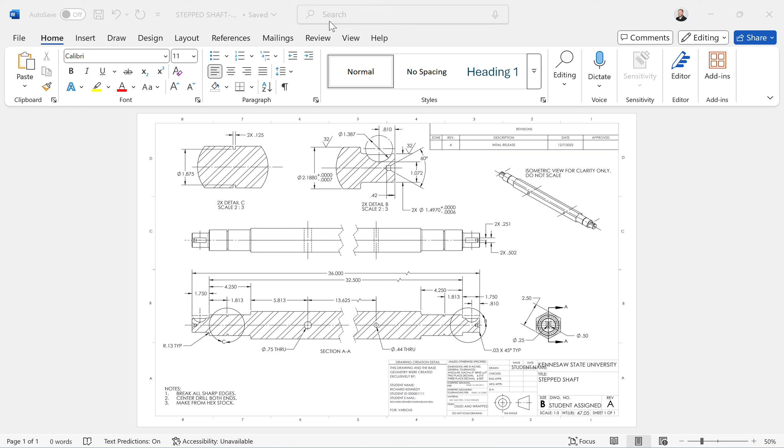So let's open our drawing and look around. I see things like 0.75, 32.5, but if you actually look down in the bottom here in the info, we can see the weight is in pounds, showing us 47.05 pounds, which we can actually inspect after we make this part, to see if it's somewhere close to here.

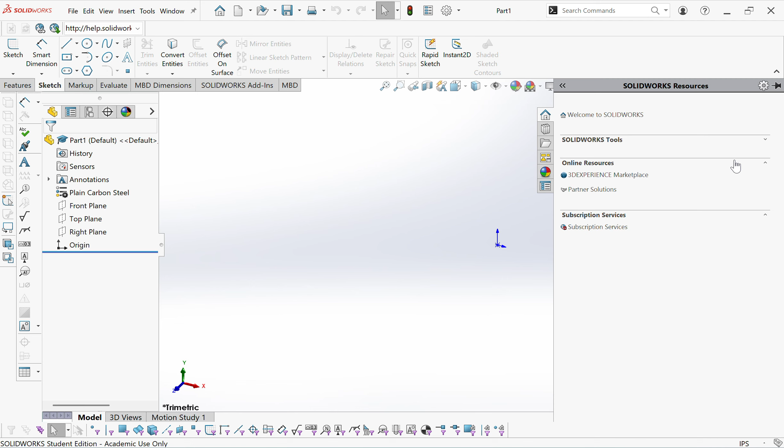So let's go back to SolidWorks, and we're going to go into our SAE units. So open that up. All right, now I have this up here. You can just click anywhere on the main page and that'll go away.

So we're in our work environment, and we're going to start our sketch. I'm going to take a look at my part. I'm going to most likely make it symmetrically and extrude it both ways, that way I can mirror this feature over, all the major design points, and then the minor differences, like this is a bigger hole, that's a smaller hole, I'll make those separate.

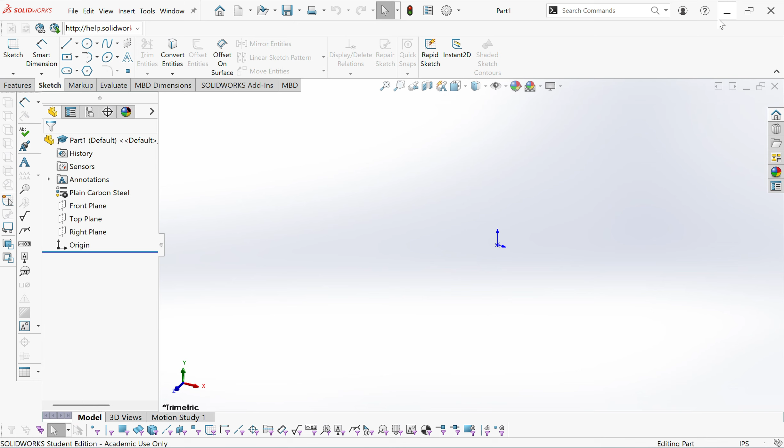But let's see, I made this and I only got up to the point where I was making this before, I didn't get through the whole part. So again, this is just kind of showing you what I do and how I'm going through this. I'm going to start my sketch, just pick the front plane. The first thing I noticed off the bat is there's a few circles in there, and I'll have to go back and look. I think I was doing 3. So sometimes that doesn't sit down perfectly.

I'm going to drag this and put it on that point. So you can do a few constraints and make sure those are all concentric, so they're all sharing the same point. I can't drag it off there, so it's paired to that. Now I can just adjust the size of these.

I'm kind of getting into the weeds here, but let's get back on it. So this is the view I'm drawing. I'm going to need the length of this line, which is from here to here, 1.4970, and from here to here, 2.1880. I'm also going to need this little collar, I'm going to make that 1.875. So those are going to be the diameters I'm going to use.

So let's start with 1.4970. This plus or minus, that's just machine tolerance, how much up or down you can be. So 3 zeros and a 6. You could have 1.4970 or 1.4964 -- that's going to be 6.4, 4964 is going to be the lower tolerance of it. And that's just going to be for part fitment.

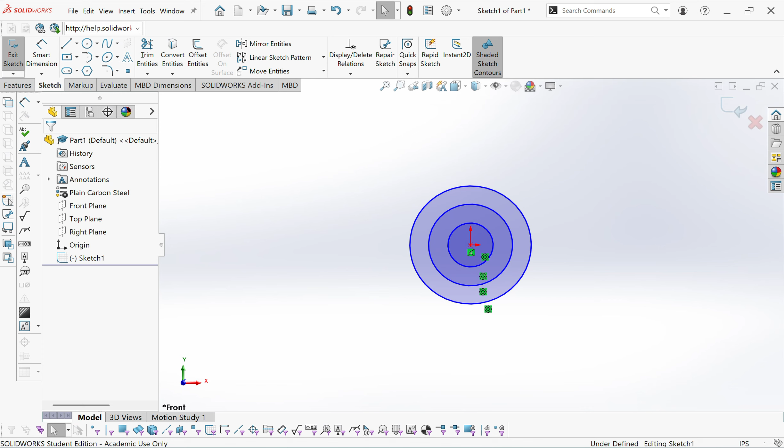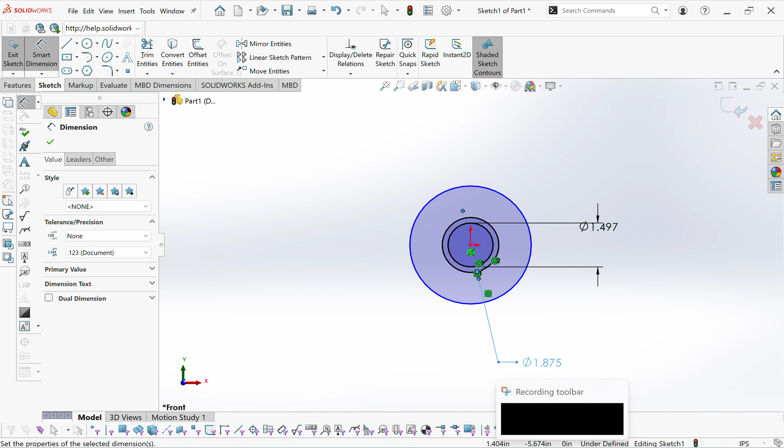So I'm going to take just this major number right here, 1.4970. Smart dimension, grab the first circle, 1.4970, enter. Let's find our second circle, it's going to be 1.875. All right, that's going to be that little collar. And next circle, 2.188, still in dimension, 2.188, enter. So now we have all of our parts.

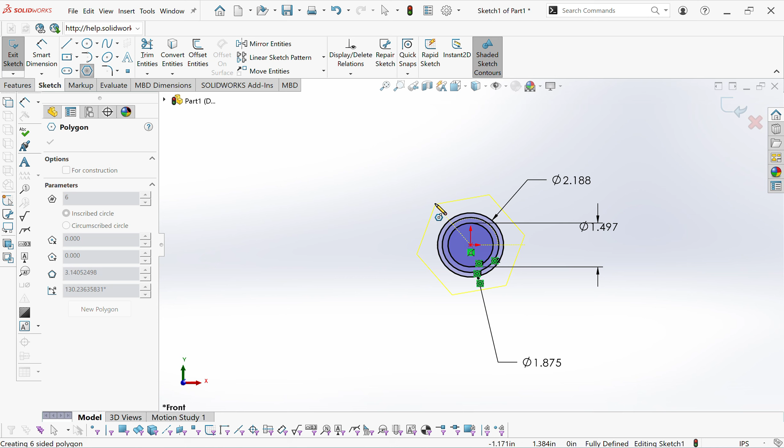We're still missing, though, this hex around the outer edge. So that's 2.5 across. The way I'm going to make that is grabbing the polygon tool, and it's going to default on the shape I need. I'm not going to attach it to anything yet.

What I'm going to do is make a construction line straight up from the center point, and you can see this constraint's added to it, so it's vertical right now. I also want to click on that and change it to a construction line, by clicking this and switching it to construction geometry, which you can also do over here and hit for construction.

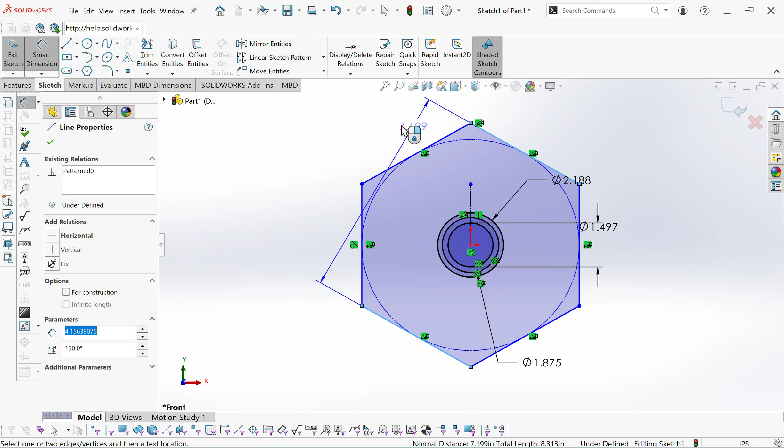What I'm going to do is click this point, hold down shift, and select this line to make those coincident. Now it's facing the direction I need. Now I just need to dimension from here to here and make that 2.5.

So now we have our drawing, and we can work off this. Now we're getting somewhere. I'm going to go to features, I have this drawing already selected, and I'm going to do boss extrude, from sketch plane, mid plane, and let's see how long this bar is.

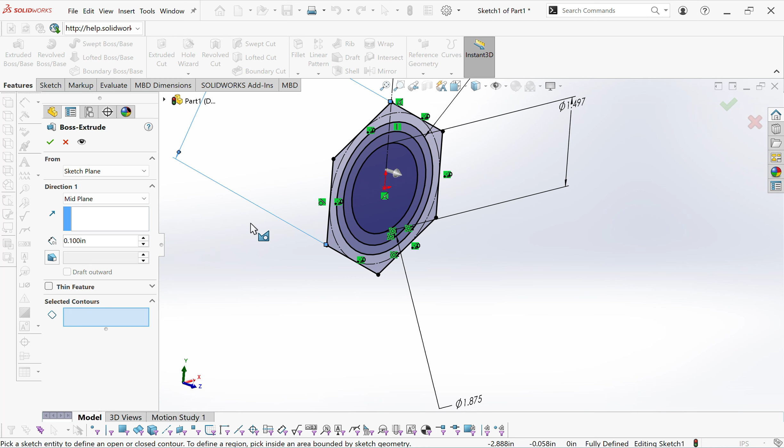First we're going to do 36 inches. Let's click this first one, and I'm going to do 36, make sure it's inches. It should be, yeah, 36 inches. Mid-plane. Check. Cool.

So now what I'm going to do is select this sketch again, hit features, and extrude. So now I'm going to select - oh, you know what, let's pause right here.

Yeah, so that's the inner circle. We need to pay attention to where that is. So we need to do the next two circles. We need to extrude on this one because I'm going to cut the collar out later. So it's going to be here and here - how far? 32.5 inches. So let's do this.

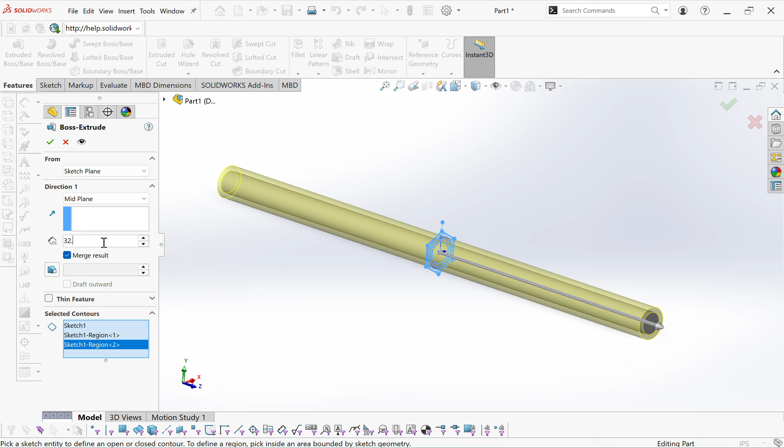32.5. All right, hit check on that. And then we've got this part right here, which is this hex shaft. That's 2.5. That's right here.

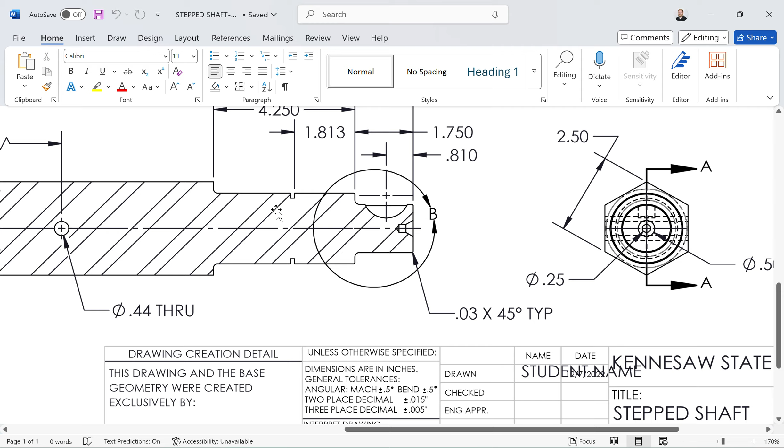And I've got 36, got 32.5 minus 4.25 plus 4.25, which is going to be 8.5. So 32.5 minus 8.5. And if you don't want to put all this in here or do the math, you can type the formulas into SolidWorks. I've gone over this in some other videos, but you have 32.5.

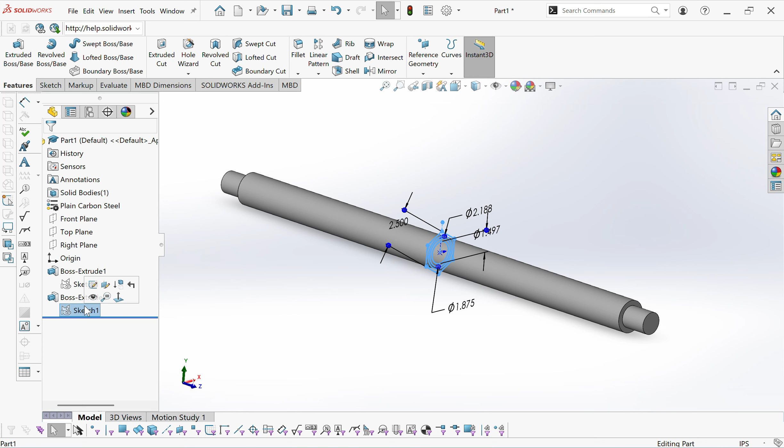So now let's see, let's go within this sketch, edit - oh sorry, I didn't necessarily need to hit edit. I just needed to select the sketch and go to features, extrude, and I'm going to select this hex. Now I have 32.5, and if you remember, I need to subtract 8.5 from that.

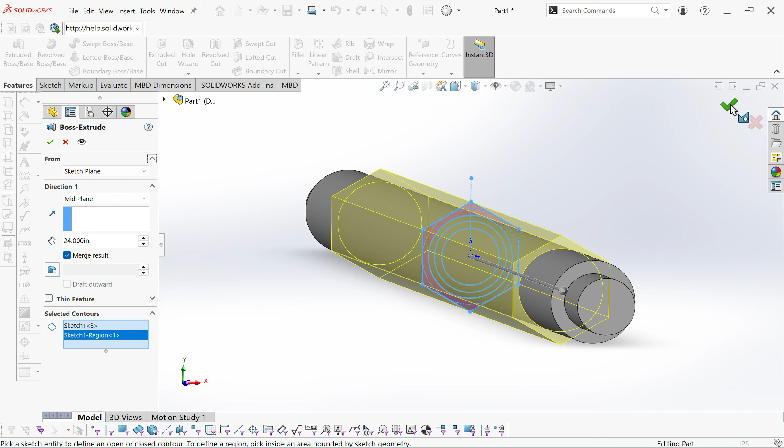So now this is what my part looks like - it looked kind of weird like that, super chunky, but this is what my part is starting to look like. Now we can go back to that other circle as well. I might have actually wanted to do that before this, but let's try it from here.

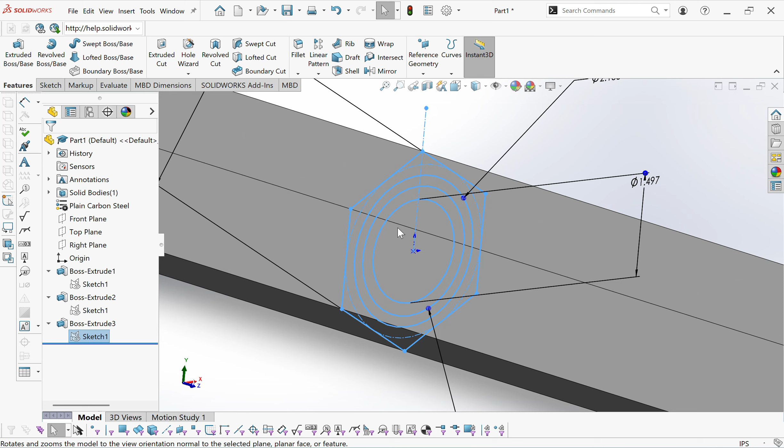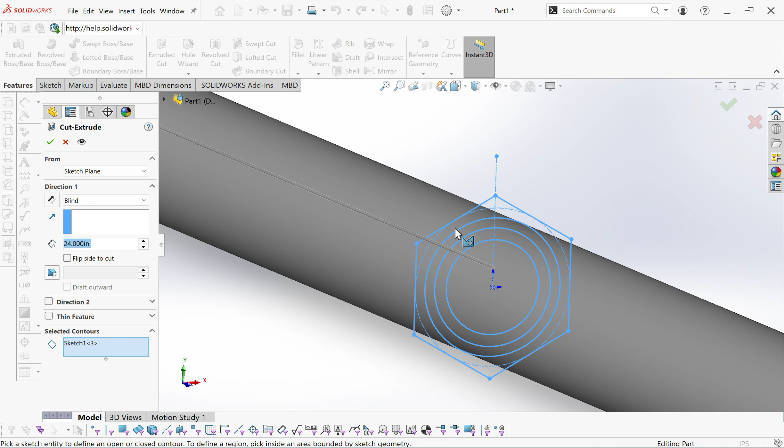If I hit sketch and select - yeah, I'm going to control Z back from... I'm going to go forward. So what I think I actually want to do here first is select this sketch and extrude cut the outer circle if I can. Yeah.

So this one is a little tricky. I need a cut that is 0.125 thick to be offset 1.813 from that face. So let's mess with some stuff and see what we get.

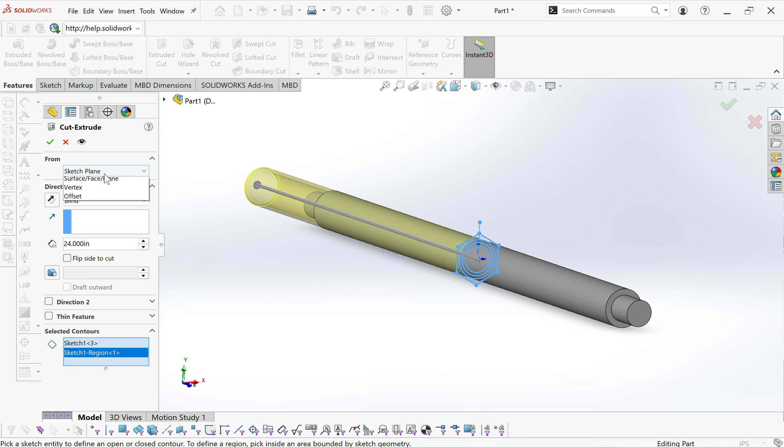We're going to do offset from - oh, I guess it doesn't matter the face, we'll go offset from the drawing. Let's do 3 inches and see where that puts us.

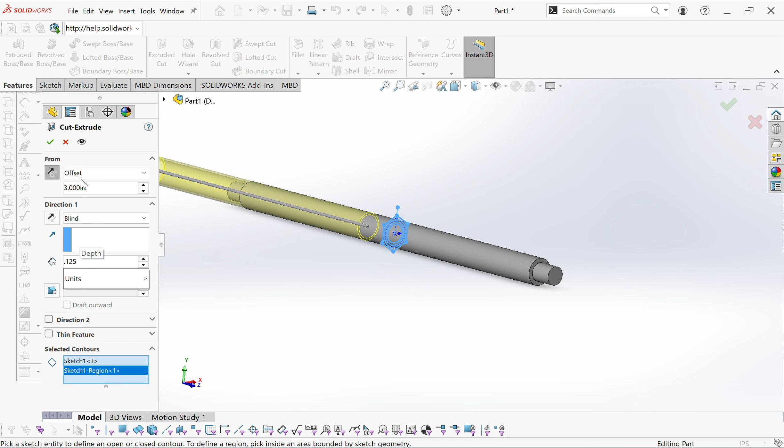So that's where the offset is, and you can change the direction here. See, this is going to be the thickness of it, I think, so 0.125. All right, so that's the thickness. Now, where is it measuring to? Which side of this cut? I'm assuming this inner part, but we can mess with these dimensions and see.

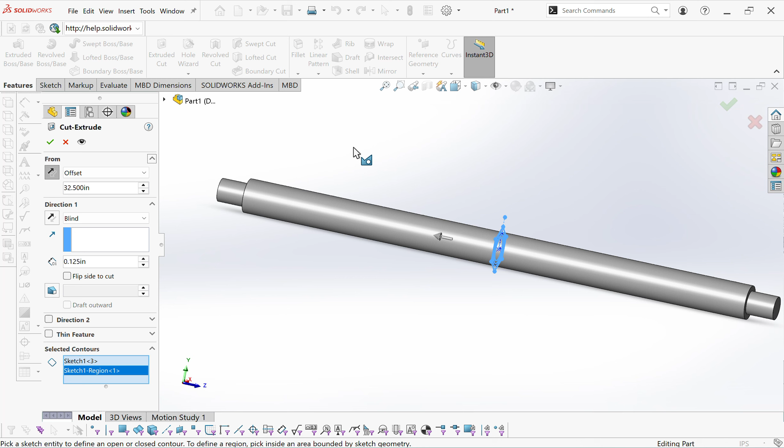Oop, didn't mean to open that. Let's go back to here. 32.5, it should land on the outer face. So if we do 32.5 - oh, now it's way out here because I was on mid-plane.

So again, typing formulas in here, let's type in divided by 2. And now you see the cut is landing on the front of that face. So if I subtract 0.125, right, now it's measuring from that face.

It's kind of hard to explain, but what I had was that cut was just in front of here, and I subtracted 0.125, the length of that cut, and now it's right here. I need to make whatever line is right here set back 1.813. So all I'm going to do is, now that I have it flush here, subtract 1.813.

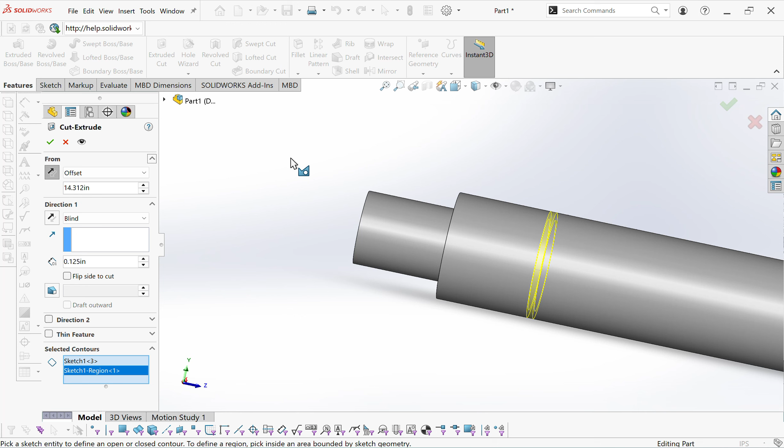Now I have my cut. With that cut, I'm going to mirror, and that cut extrude is already selected in features to mirror. When I click my mirror face or plane, I'm just going to go back to the plane that I was designing on initially. So it's flipped symmetrically along there. What I'm going to do from that is go back to my sketch and select that.

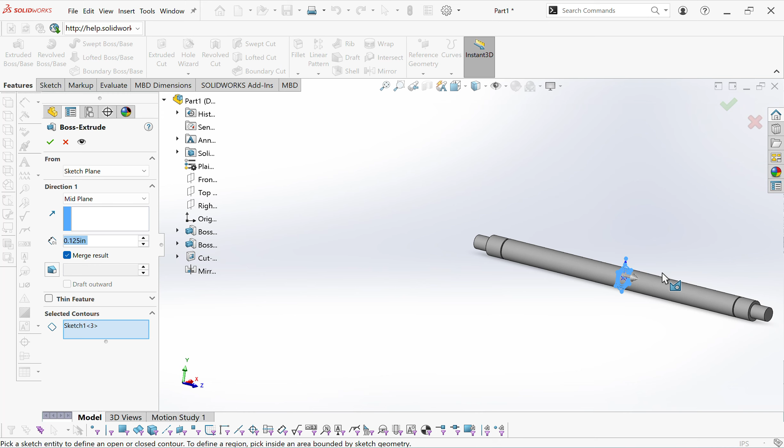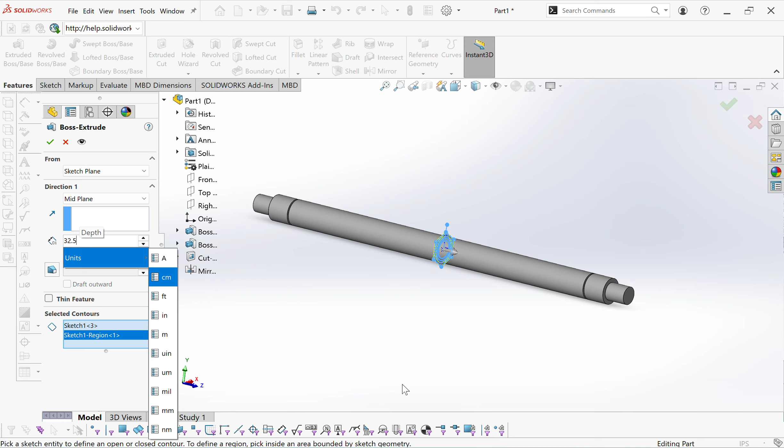Now I can extrude this hex. So that hex was extruded. Again, I'm going to keep opening that just on accident. 32.5 minus 8.5. So let's do 32.5. Let's just make sure, 32.5 minus 8.5. Minus 8.5. So now it's starting to look closer and closer to what it is. Let's see what other steps we can do in here.

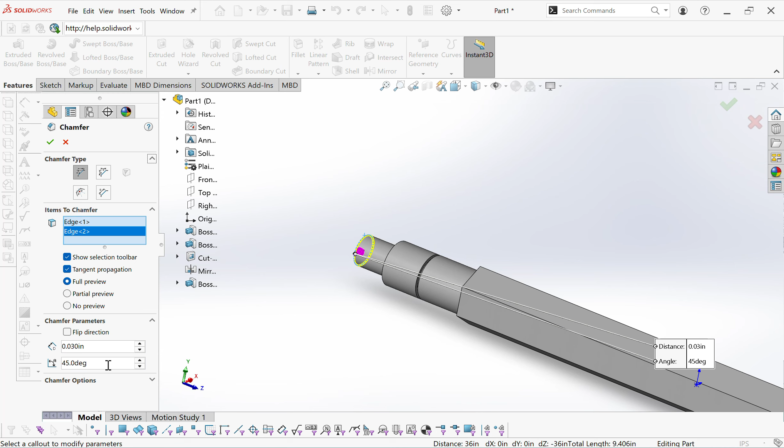We have 0.03 chamfer, 45 degrees typical. So let's take that off. We're going to go to our fillet drop down and hit chamfer. We're going to click that edge and that edge. We're going to go, I think it was 0.03, 45 degrees typical. Let's just double check. 0.03, 45 degrees typical. And typical just means anything that you see with a chamfer is going to have the same. Typical just means it's the same all the way around.

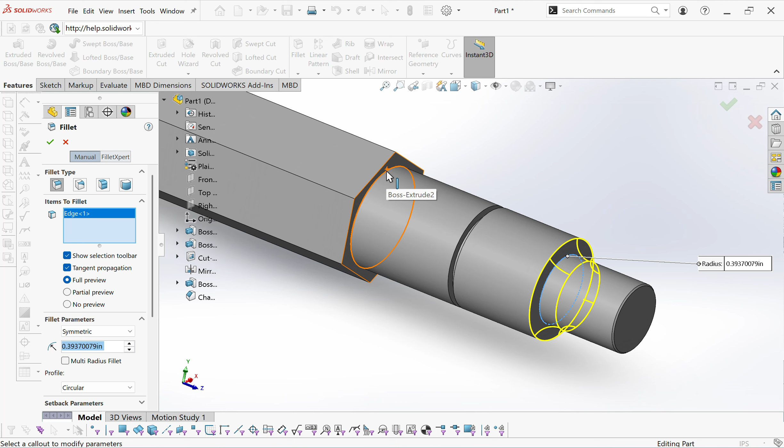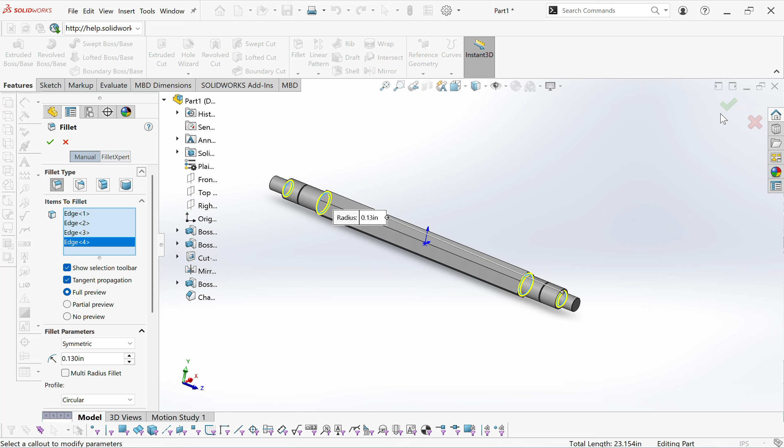Just like I'm sure this radius is going to be typical, so let's find that. Radius 0.13 typical. So let's put those in and hit our fillet tool. We're going to fillet this, that, and then the same ones on the other side. Right there and right there. And you can see it's radius. Make sure you have the right one if it's radius or diameter. Radius is 0.13 typical. 0.13. Accept. Cool.

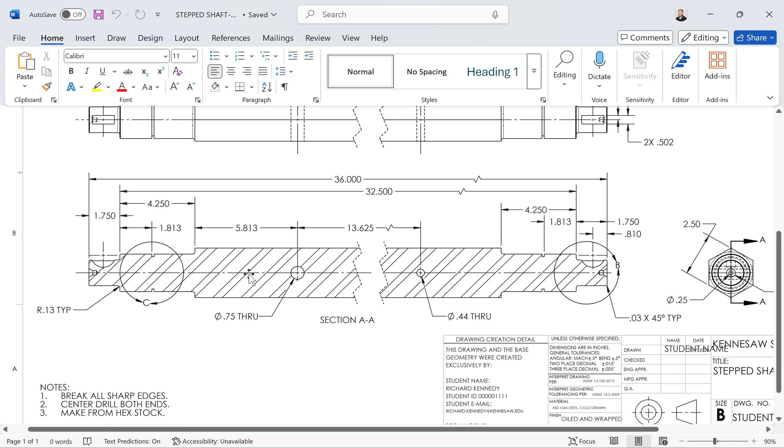So what can we do next? Let's see. The holes are going to be relatively easy, I think. These might be a little difficult because I'm not super good with the hole tool yet, so I'll leave those to the end. I might go after this keyhole and see if I can do that.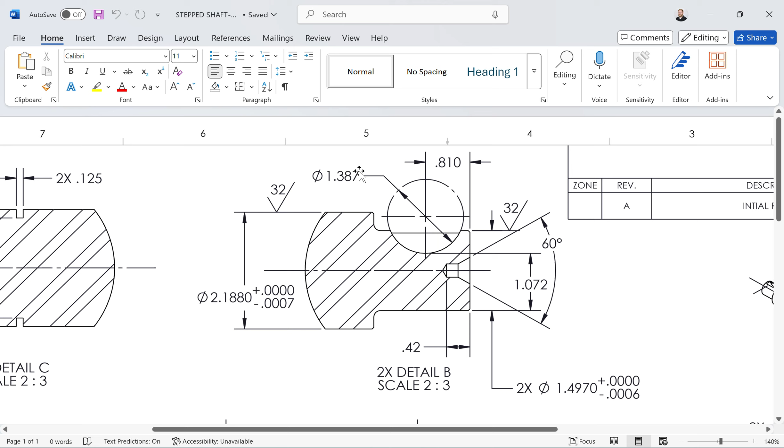So, what information? I have a diameter here, 1.387 is the diameter of the hole. I have the length or the distance off this face is 0.810. And this is kind of weird. I have another dimension to the bottom of the circle of 1.072. 0.81, 1.387, 1. Okay. So I'm going to have to draw a circle. Let's just go through it.

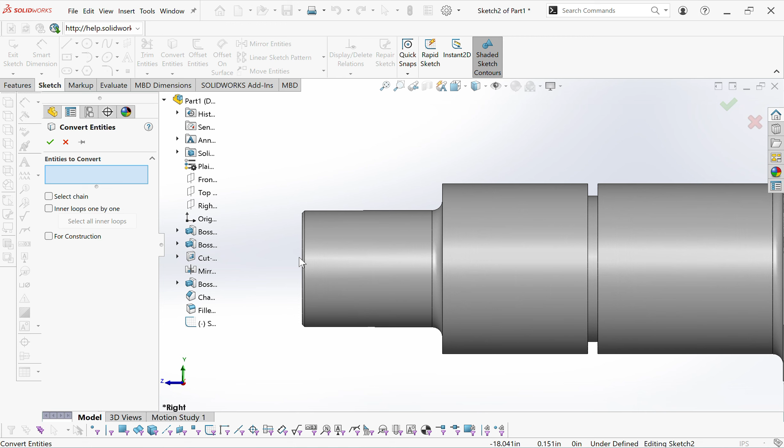I'm going to go to sketch and let's see how we're going to go about doing this. This is going to be on the right plane, and I'm going to start by stealing some geometry most likely. So let's convert entities, and we're going to need this front line because we're dimensioning off there. And we're going to need the lines that are connecting it because we're going to have to make this a closed shape. We might actually not need those. Let's clear selections and go back and click this. Click this back line. We're definitely going to need this.

But now that I'm thinking about it, sorry if you're following along with me. This is more of just showing my workflow. Clicking these two outer lines, I clicked in here and it picked the one for that fillet, which I didn't want. I'm going to click this front line right here and this back line, and that's going to give me a good box to work off of. I could also click this and this, and I can extend these lines later. Oops.

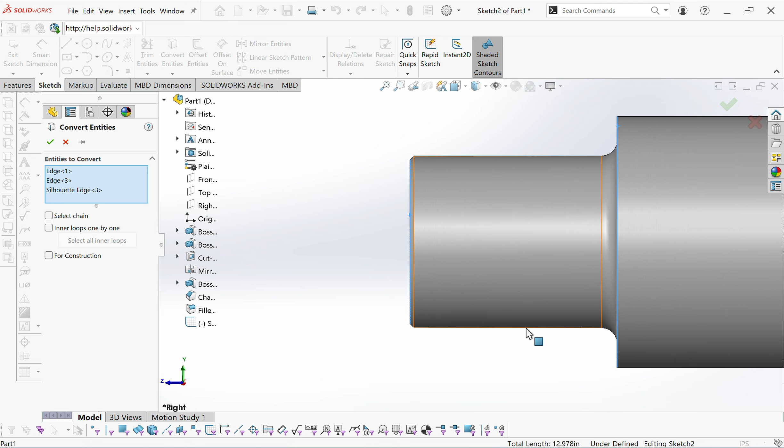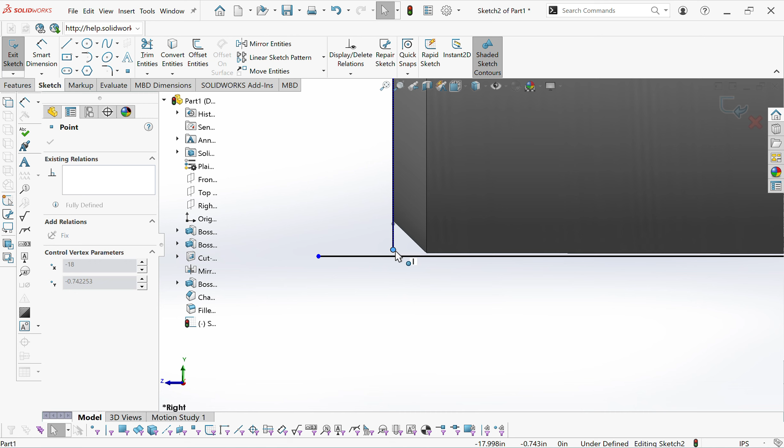Okay, let's start there. So these lines aren't touching, and the decisions I was making in my head were that I could just do this and extend. I guess that can extend, but these don't have anything to extend to. I would also prefer, I don't like that it doesn't show it running along there if I converted it. I'm not sure why. Must just be a graphics issue. Because I'm sure if I convert.

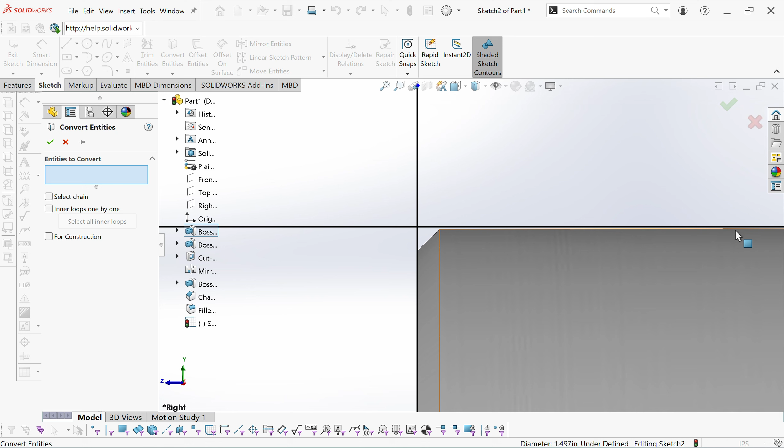Huh. We'll deal with that later. Let's see. We might actually be able to just do this. Could grab this line and that. No. I think it's just a graphics issue. But I'm going to go back here and trim these. Let's just hit OK for now. I want to hide this body. Let's go to history.

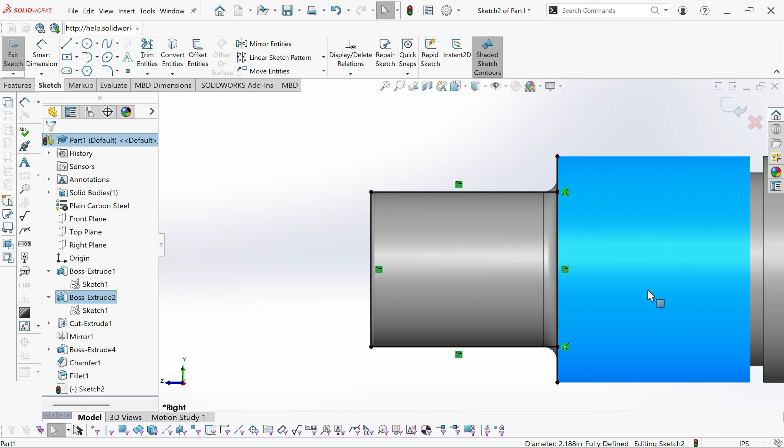Okay. So I have this part right here, and I want a circle. Sorry, I spent too much time kind of messing around with this. I don't even really need all of that. I just need a few key points, but diameter is going to be 1.387. Diameter 1.387.

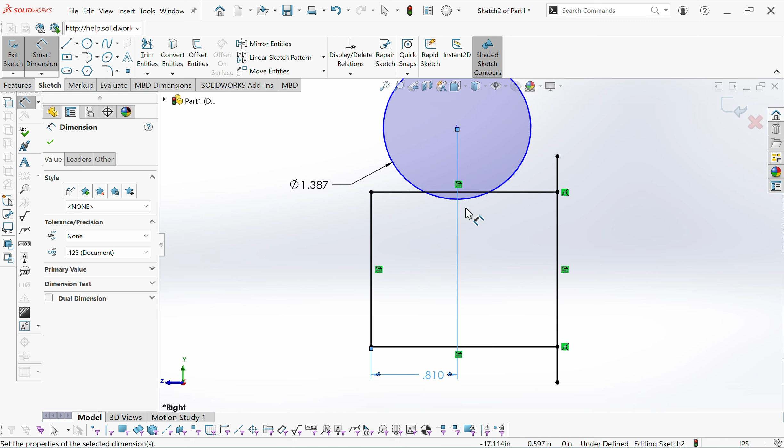From here to here is going to be 0.810, 0.810, and then I might need to put an actual point right there to let me dimension. From there to there is going to be 1.072. 1.072. Okay.

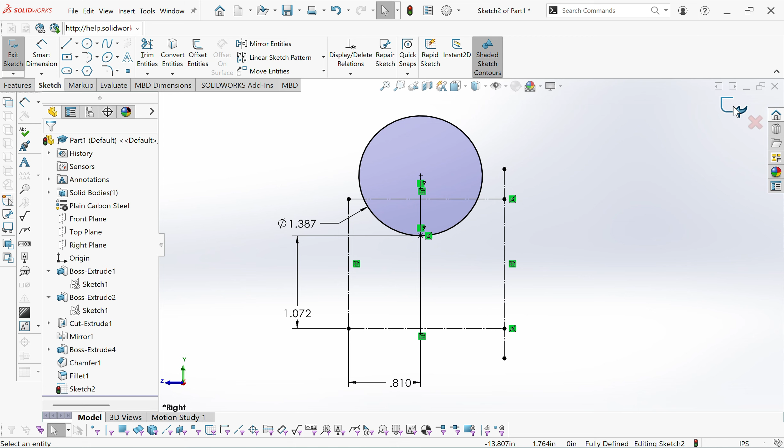So these are all really going to be construction lines anyway, so I don't need them now that I'm thinking of it. So sorry if I took you on a journey with that, but this is just to constrain the circle, which is going to be cut. So I'm going to switch all these to construction lines. I'm not going to delete them. This is constrained. You can tell by the solid black line. So I'm going to back out of here,

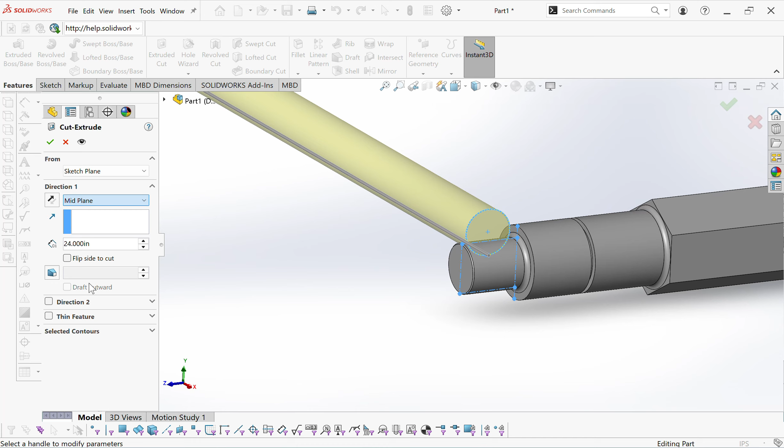and I'm going to go back here and show the body. That's where my key is going to be. So I'm going to select that sketch and go to features and extrude cut. So I have this on blind. I'm going to do mid plane from where it's at and go back and see how thick this cut is. So let me zoom out a bit. I have this at 2X, 0.502 thick.

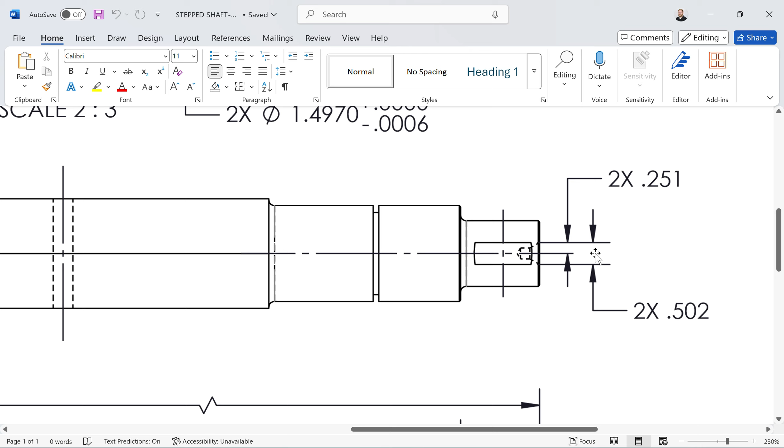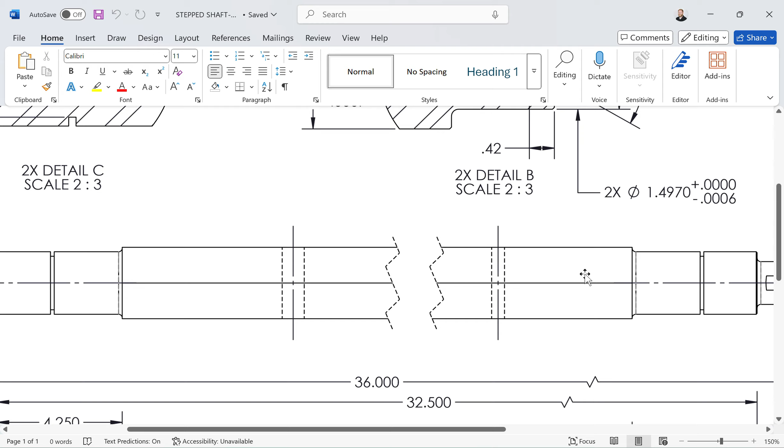And I think it's showing that cut. Yeah. No, that should be showing the cut. Is there anything else that would show it? What I am seeing here is I'm slightly confused on if this dimension is going to my keyhole or if it's going to, let's see, I'm seeing a few things. All right, first thing, is this slightly rounded? Second thing, it looks like this dimension is going to this keyhole. It's going past that drilled countersink, whatever that is right there.

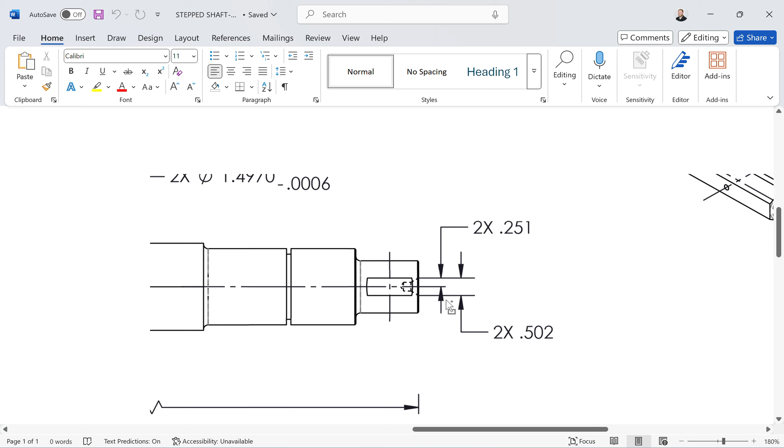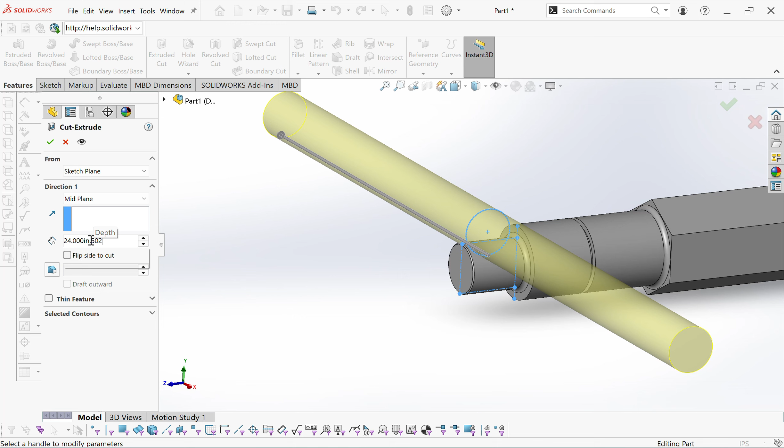Okay, so this is 0.502, see 251 from the center, or 0.502 overall, and we're doing mid plane, so I'm going to do 0.502. Oh, I still have these in here. Let's hit enter on that. Okay, and I think that curve is just natural from the slope or from the arc of this. I think that curve, when you make a straight cut, comes in there naturally.

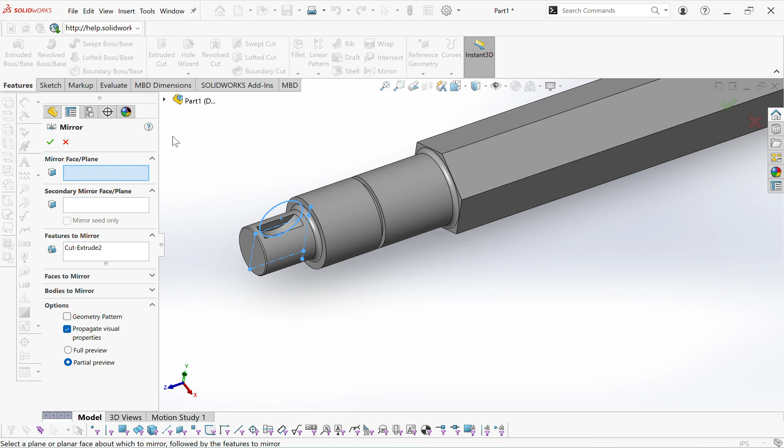So now we can also mirror this. Let's see, go to here. We're going to mirror that cut extrude, and then the face we're going to pick is going to be that original one we drew on, which is the front plane. And you can preview it right there and hit go. So now we have both of those key slots. Now I'm going to put that back in isometric. Let's go back here and just hit the generic isometric. There we go.

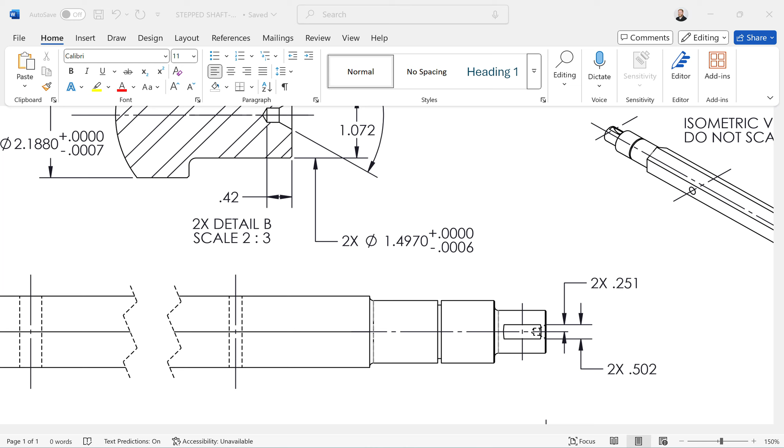So now we can put in these holes. Let's kind of zoom out and see what else. We've got all of this done. We've got that circle, got that diameter. We've got that length done. From here to here's done. Okay, that is going to be the 60 degrees for this hole right here. 0.42 away, see detail B, scale 2/3.

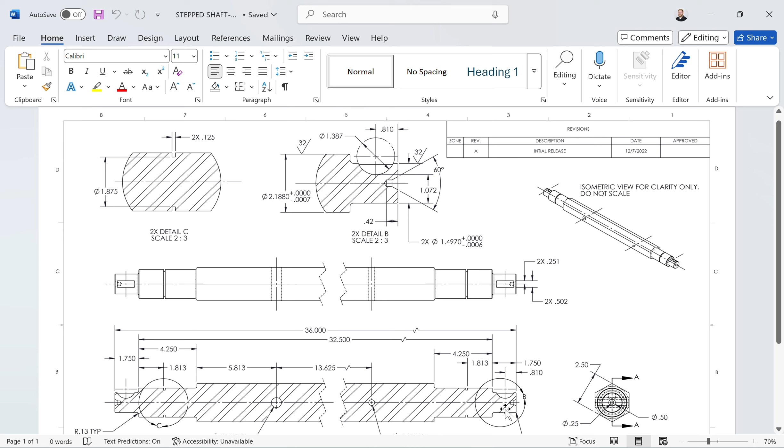Where's detail B? Detail C, oh wait, detail B, scale 2/3. No, this just says 2 times on detail B. 2 times on detail C. So detail C, detail B is right here. That's the cutout that's up here. We'll get back to that. Let's do these holes right here. Let's see. And this has a break in it the same way this has a break in it. So it's saying that's not necessarily the length.

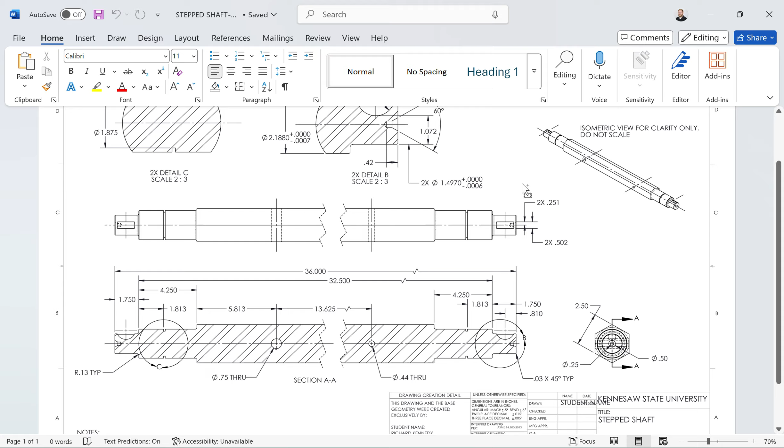The first hole is going to be 5.813 off this face. So let's see how we're going to do this. It's a 3/4 inch through hole. And it looks like, okay, that's the center line, and it looks like it's on a flat face. So on one of those flat faces, I'm going to start a sketch with a hole centered on the part and 5.813 over. So on here, we're going to open sketch, and let's just pick this face right here.

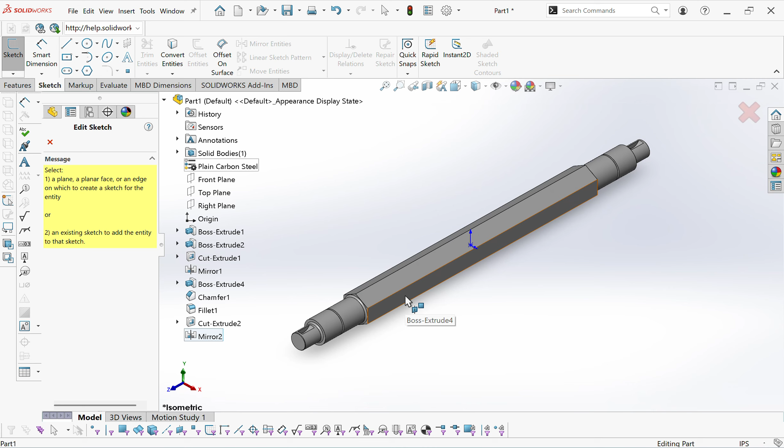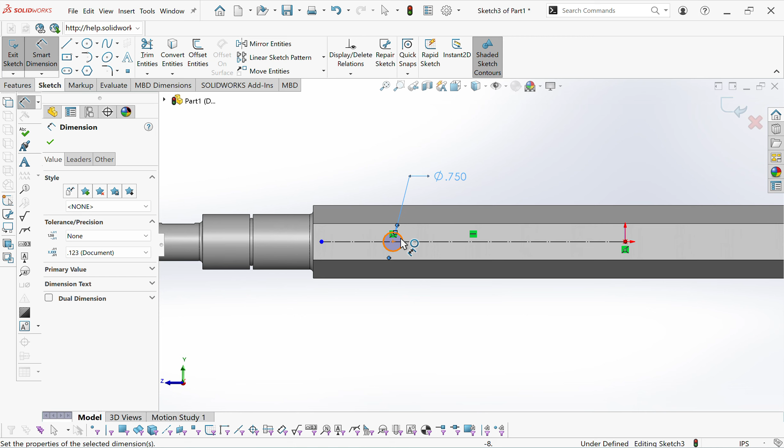And I'm going to draw a center line. I'm just going to take it to here, and all this is going to be is a construction line. So I can draw a circle on here. So I can't move it up and down, but I can move it side to side. And we are going to dimension this at, well, that's pretty close, 0.75. And then the center point from this line is 5.813.

5.813. So now you have a solid circle, and that's where that needs to be. That is constrained. Now we have a 0.44 diameter through hole, 13.625 from the center of there.

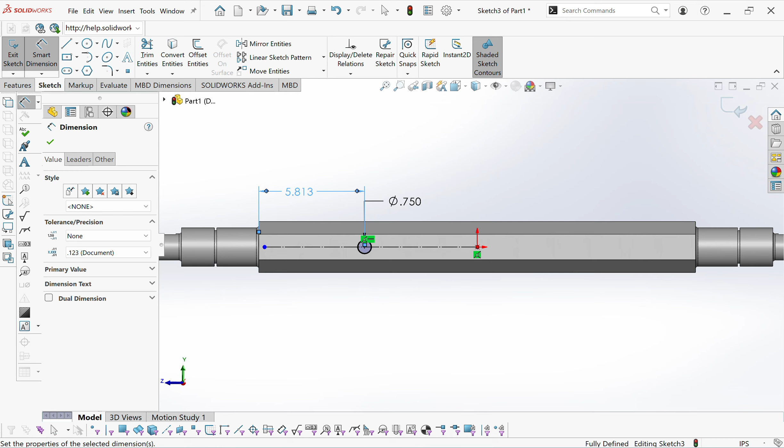So we're going to draw another circle right here, and that's on the center line. So if you try and move it up and down, see it's not constrained. Oops. So let's grab that and shift and hit that, and we'll put those coincident. Now I can move it back and forth, but not up and down. We also know the diameter of this is 0.44.

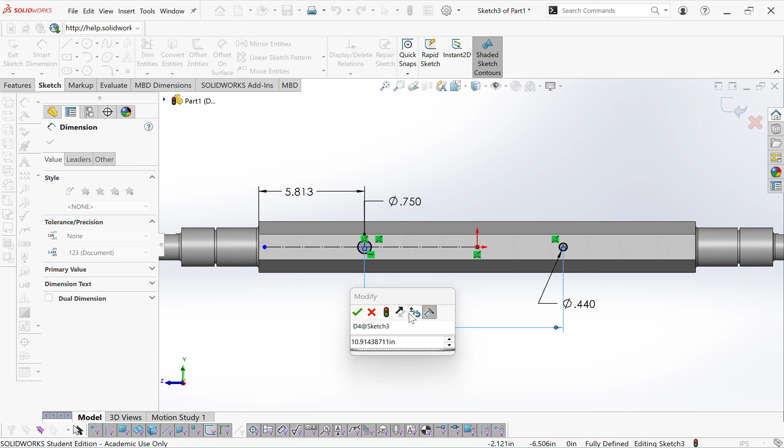So now we have that hole, and the last thing we need to constrain it is the distance from center point to center point, which is 13.625. And we will hit enter. We can back out of here.

And you could do one of two things. You could go to your features and extrude cut, or you could hole wizard. I'll just do hole wizard and see. Again, not great with the hole wizard yet, but let's go to ANSI inch. See, this is what I don't know. I need it 0.44. Not sure what that is, or if I want to mess with fractions.

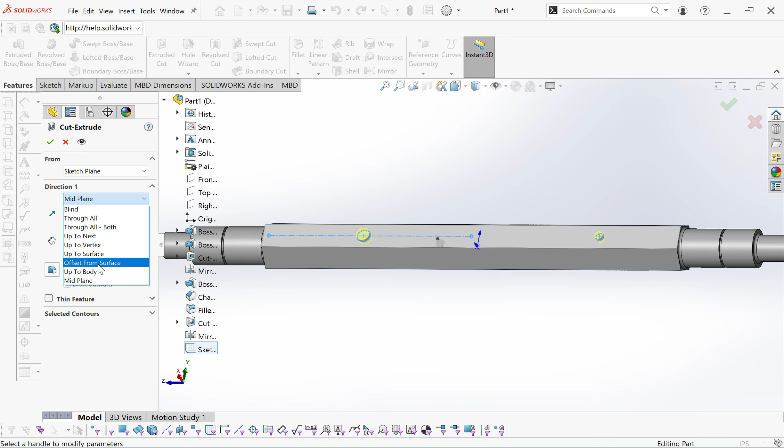Yeah, I've already got those holes drawn, so you could do the 0.75 and drop that on there, but since I'm going to do these both the same, I'm just going to open my sketch, extrude cut both of these holes, and go through all. Now I've got both of my holes in there. The last part I'm going to need is the little pins on these sides.

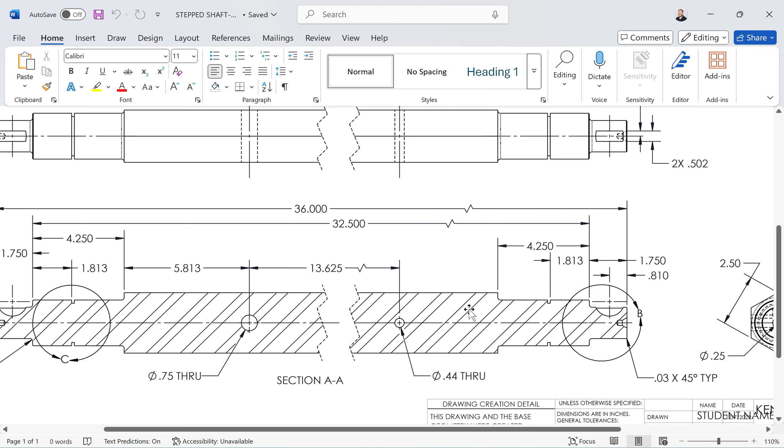So let me think of how that one might have to be hole wizard. So let me pull that up. It's going 0.42 deep. Let's get a little closer. 0.42, actually to that, without that wedge, you've got 60 degrees. 0.42, let's see if we do a hole wizard and we do countersunk. Let's see what's in here.

There might be, this shows the end condition, which is ending right there, not including the tip, just the shoulder. I guess we could use this as 0.42, right? 0.42. And I have it set to countersink. And then maybe let's find the diameter of that.

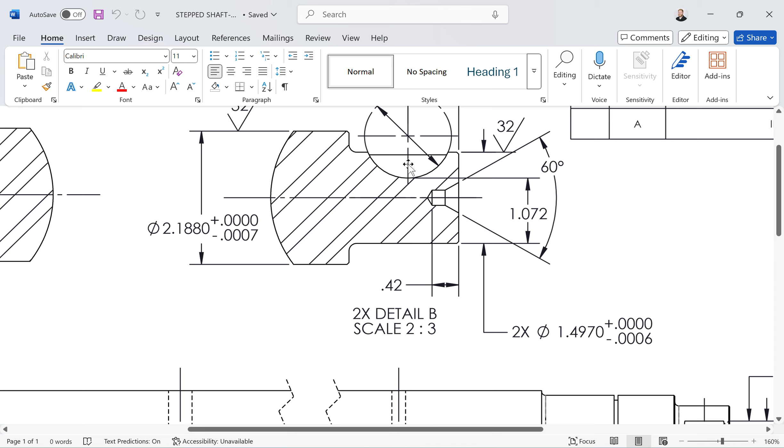So it's 60 degrees. It's the diameter of that. 0.42. Oh, is it maybe on the front drawing? Yeah, 0.25 and 0.5. So this is going to be 0.5. That's going to be 0.25. So 0.5 hole is going to get countersunk, and that's 0.25. So it's a 0.25 hole with a countersink. That's 60 degrees. So let's see. That's a quarter inch hole.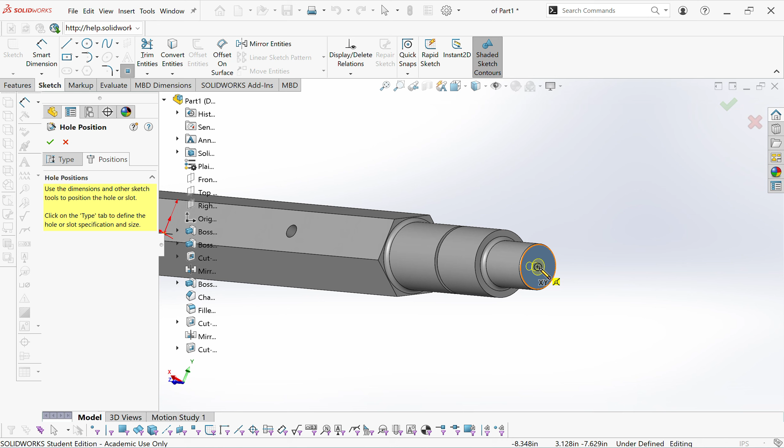Do a normal fit. And maybe it defaults 60 degrees. Tolerance and precision, don't need that. Don't need that. End condition, blind, shoulder, hole specifications, normal fit, hole type. Let's see if this works. Let's put it right there and check. So I think this worked,

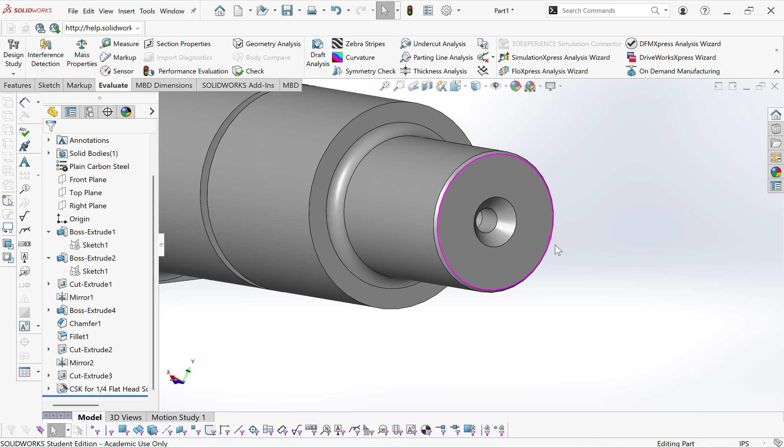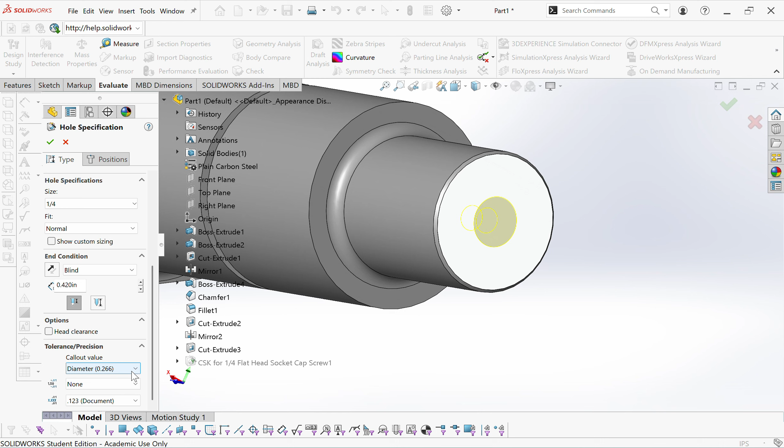but that might not be aggressive enough. Let's evaluate from here to here. What angle? I don't know if I can get that angle. It's got to be in the feature somewhere. Let's see if we edit feature. Maybe it is. Maybe it's not. Let's do this and just check how close we are first.

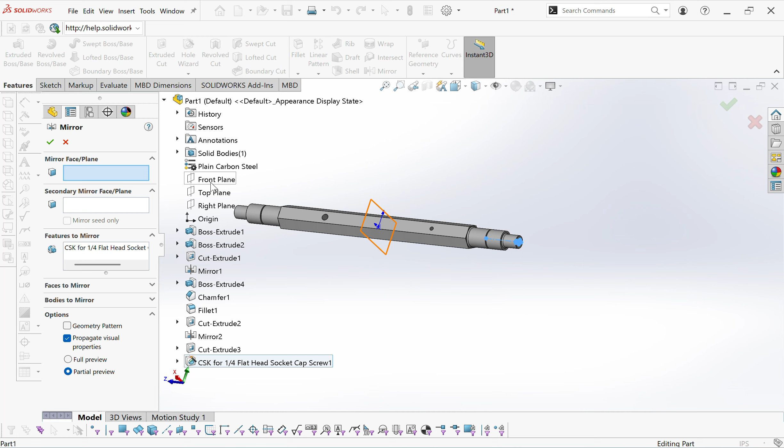Let's take that part, because we can go back and edit that individually. But what we're going to do, go over here, is mirror that feature. Again, going to mirror it across the front plane that we drew on. Now we have a preview of it over here. We'll hit check.

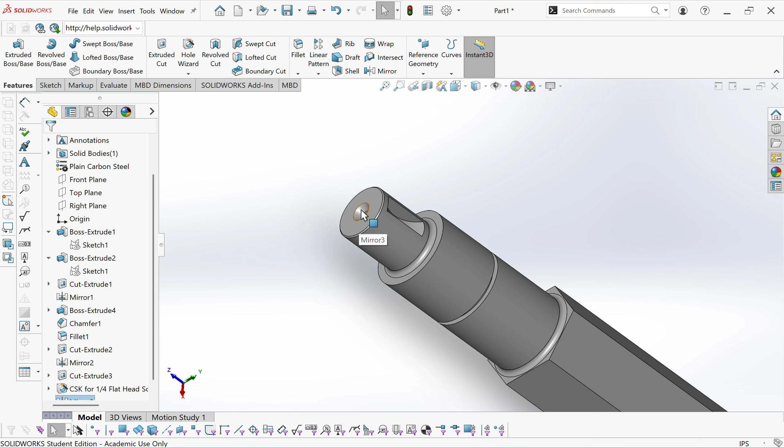And now we have a shaft with some rounded edges, somewhere to put a little collar or ring, another rounded edge, a keyhole, a chamfer, and a little spot to put a pin. Got the holes in the center symmetric across the face, and a hex middle part. And it's mirrored over here.

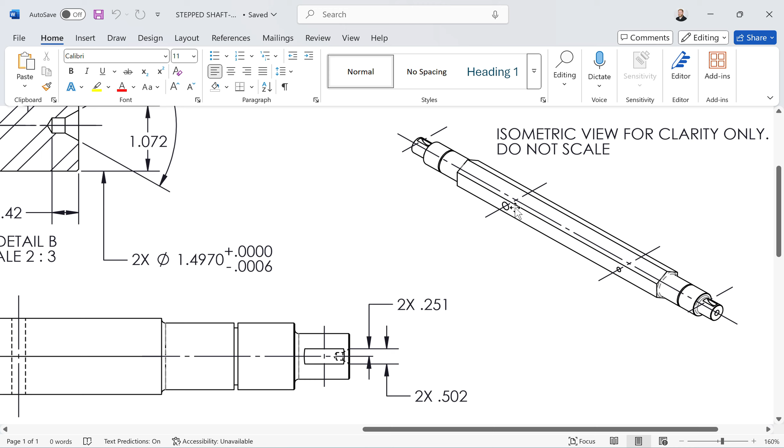So let's just take a final look and see if we're missing anything. We have our hole, a keyhole, rounded, spot for a collar, hex shaft, two holes, same thing, symmetric on there. We'll zoom out and see if we missed anything. And then we have 47.05. Let's see if there's a material call out. Geometry, dimensions are in inches. Okay, could have used that. Angular, two-place decimal, three-place.

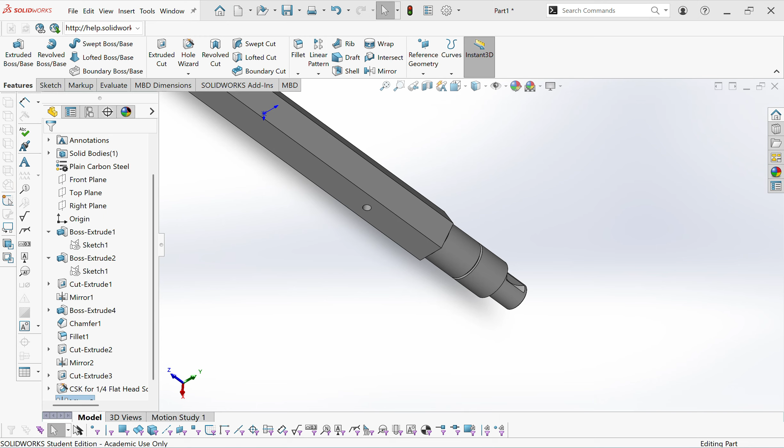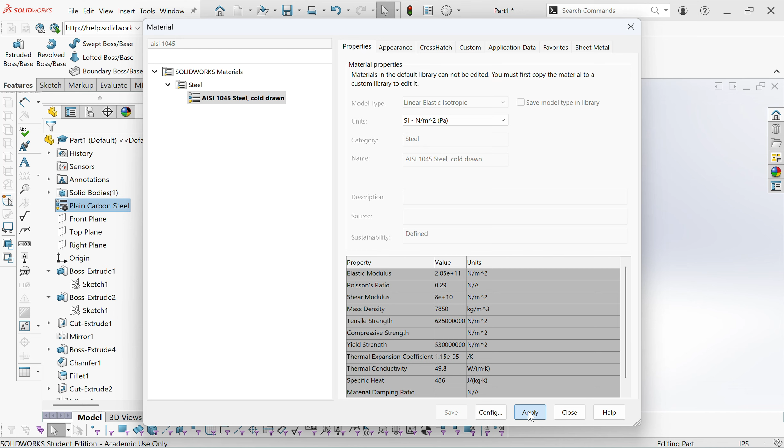Material, AISI 1045 steel cold drawn. So let's go to here and edit material and do AISI. What type of steel was that? 1045 steel cold drawn. Let's apply that and close. Let's put this part back into isometric. Go to evaluate and hit mass properties.

And we have 47.056 pounds. What do we need? 47.056. So maybe 0.06, maybe 0.01 off, but looks close enough for me. And that's how you make your stepped shaft.